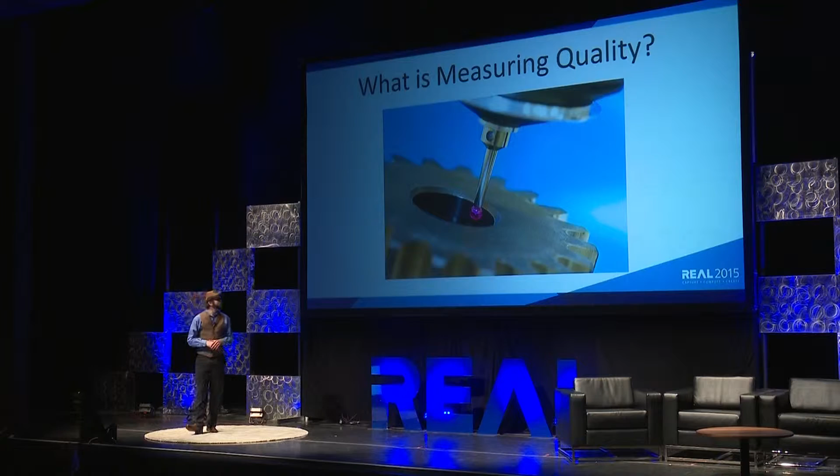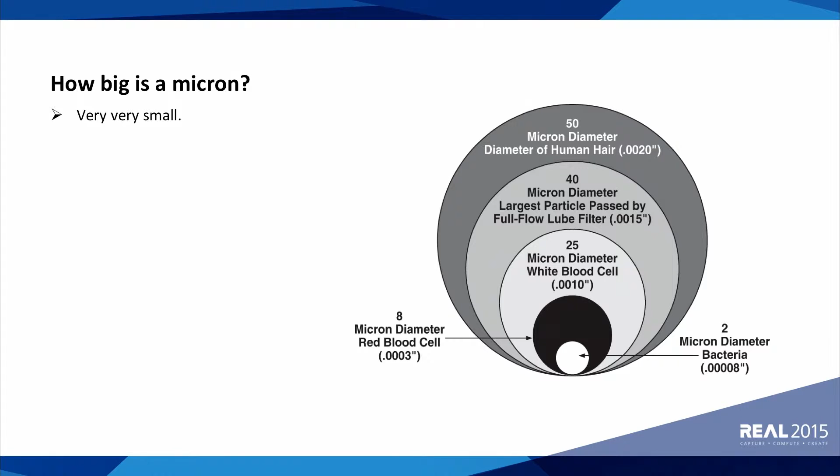So we've had a lot of talk about 2 millimeters, 1 millimeter. These are some of the tolerances I like to work in. 8 microns is the size of a red blood cell. You have 2 microns, which is a bacteria. The smallest I've ever had to measure was 258 angstroms. Now, an angstrom is the size of an atom. So we're talking extreme tolerances and trying to figure out solutions to be able to do this, because a lot of times there is no solution. You have to make it.

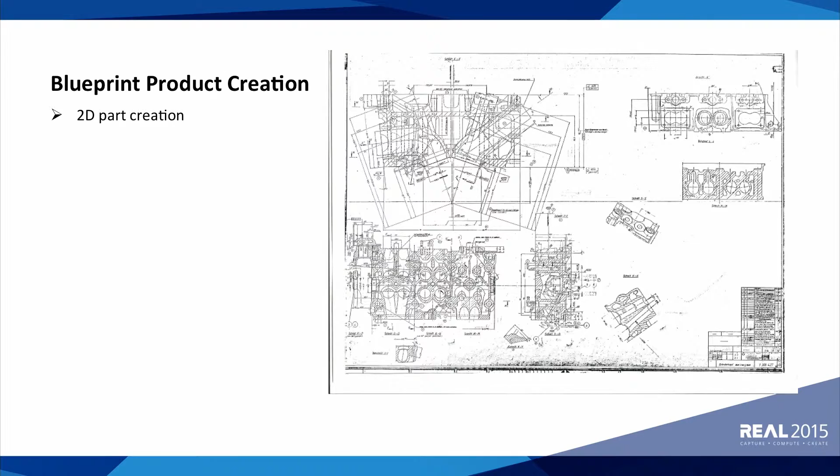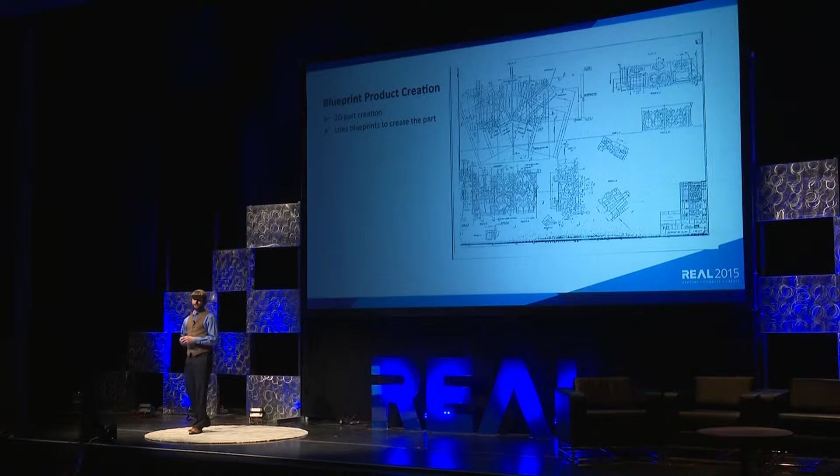So moving forward, first of all, we have blueprint product creation. That's our standard still today, actually. Models are coming, they're getting there, but over 60% of our customers and companies still all work off blueprints for measurement. And that is the standard today. Mainly because FAA dictates us holding information for 40 years. And so far, nothing we have can actually hold information for 40 years other than paper. So that's still the standard.

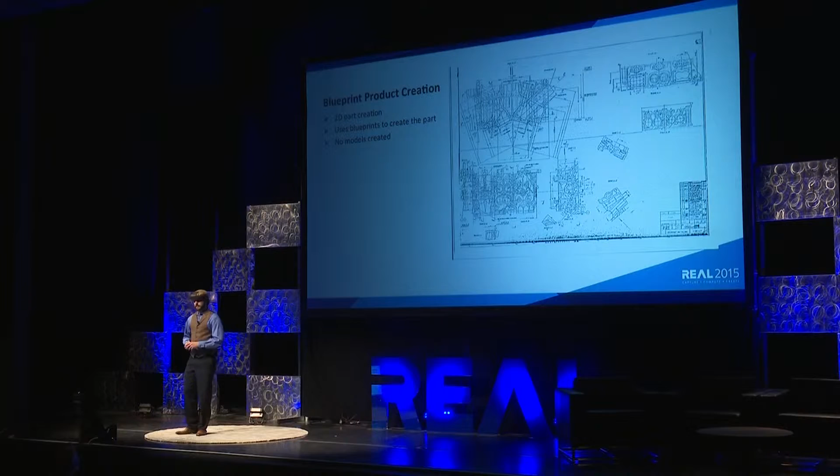Moving forward, we have model product creation. It's coming, it's going further, getting faster, and we can have teams in Asia, Europe, as well as the United States, all working on the same product together and actually create an airplane from it if we wanted to, all in real time. Using model-based definition, GD&T, it allows us and ensures us to be able to measure everything very accurately, along the lines of being able to take all the information and know we got it.

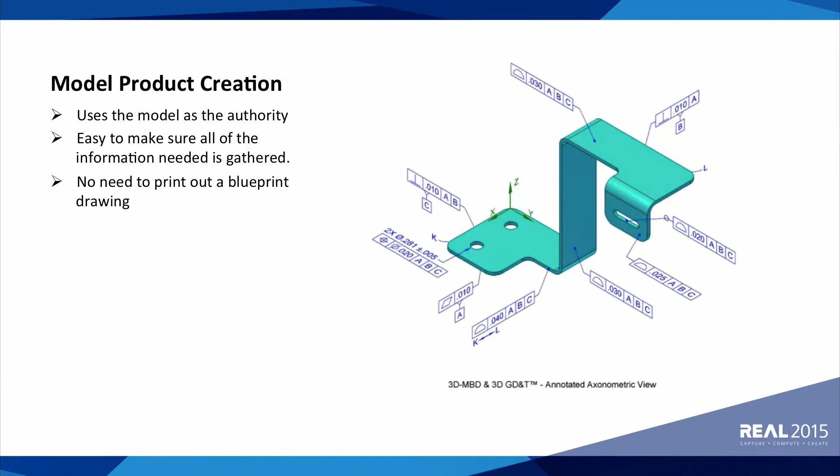If you noticed on the blueprint, it's pretty chaotic if you want all your information. So going through it, it's a tedious process. You have to measure everything very slowly and make sure you get it all. So easy to make sure, no need for blueprint at this point in time because, you know what, just measure to the model. You can align it. There's great software out there now. Align it, measure it, report it.

And there's a third, little less known, the reverse product creation. A lot of our products nowadays, like our helicopters, our planes, the A380 and the 787 are the first two aircraft for jumbo jets to ever be fully modeled. Most of our aircraft still are blueprints. I like to tell a story about how I reverse engineered the 747-4, and when I went to lock into the golden points, I needed some of the blueprints, and golden points are what aligns us to an aircraft. They pulled out a dusty old box with a lock on it for me. Broke it out, we put out all these blueprints, and unfortunately a golden point had changed, and an engineer redlined it, put his name, as well as his phone number, and unfortunately the guy had been dead for 20 years. So models and blueprints, they're not going away, but we can reverse engineer things and create something like this.

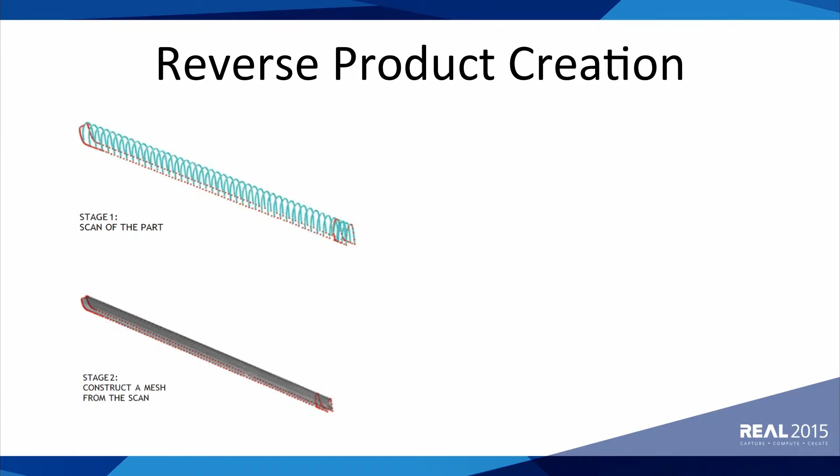Stage 1 of the reverse engineering process, measuring. Either station lines, waterline, or full coverage. Doesn't matter, whatever gets you the best accuracy that you're looking for. Second stage is creating either a quadratic or polygonized mesh. Third stage is creating the CAD from that. And then the fourth stage, the little known fact, is actually making sure what you create is correct. That's probably the most important stage because every CAD software has a little bit different algorithms. One of the big problems we have in the industry is that reason. When we create CAD, throw it into another CAD software, we get something else.

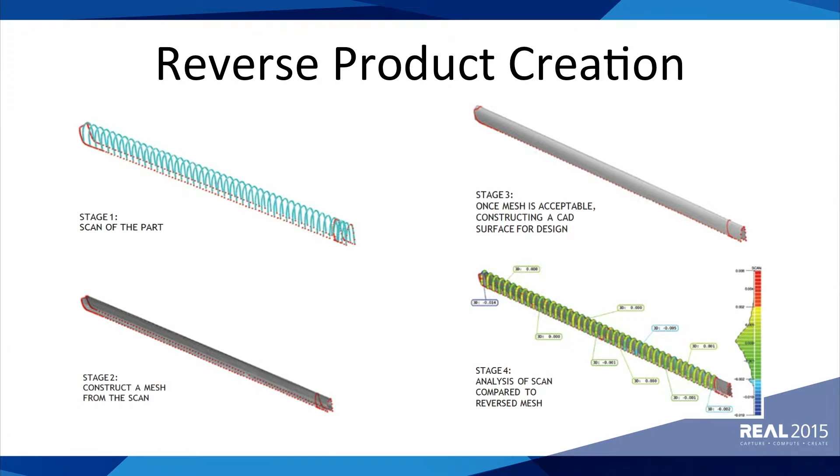But this is actually an Apache rotor blade. Pilots went out, tested multiple helicopters, found the helicopter they liked the best, along the lines of jitter and shaking, and then created a new blade from that for these helicopters since they were all done on old molds. So we created a brand new mold from that, created brand new rotor blades, and went forward.

So this is another one. A lot of things are moving towards composites. Composites are becoming our standard for aircraft now, especially military as well as commercial, getting more and more common. As you can see, this is an inlet duct. It's a carbon inlet duct. Currently, we're at 100% repair on all of them.

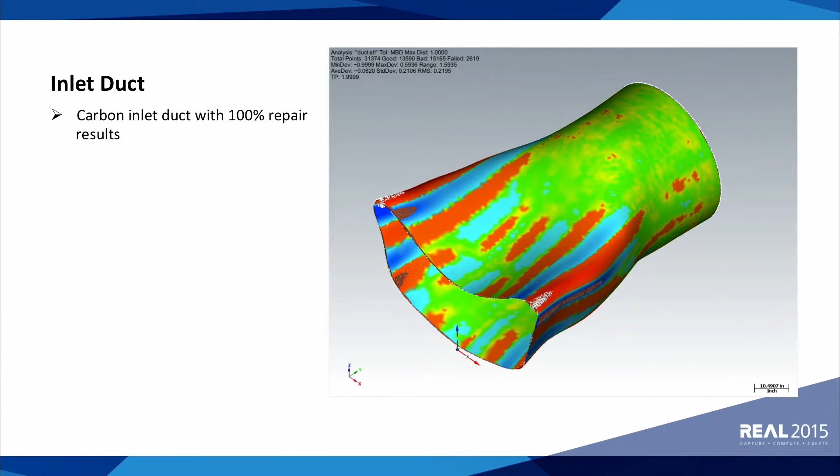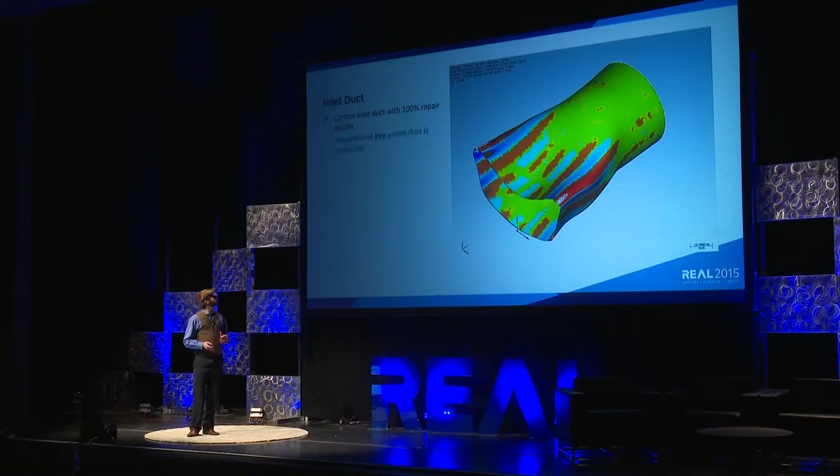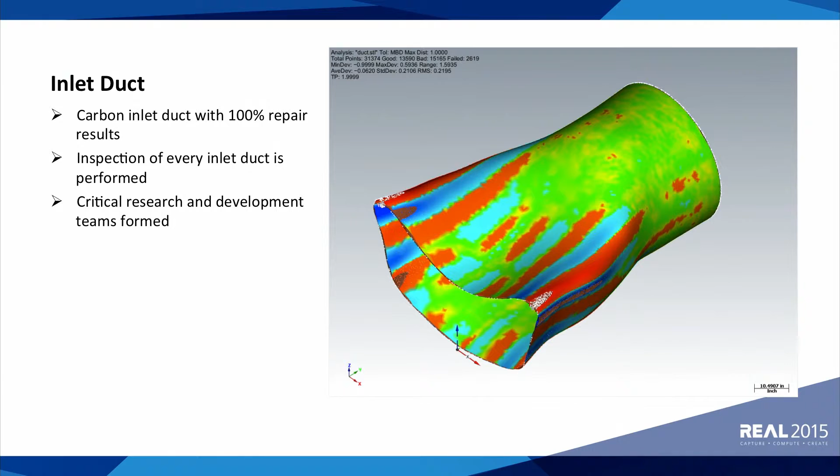Reason being is we have sacrificial plies we build into them to be able to get the geometry right, as fuel lines have to be at a certain distance from those inlet ducts because of hot air going through. But we can learn so much more from actually capturing all this data. We try to shorten the time span, but we only do 1 out of every 10 measurements on each inlet duct, or 1 out of every 50. It's about getting it to every single one we want. So we do critical research and development programs on situations like this to better understand what we're seeing, to be able to change it inside the process.

This is a wind blade. A lot of the wind blade manufacturers today are at 1 blade a day manufacturing. That's quite something when you imagine that blade there is 40 meters. So creating a blade a day, and they go up to 65 meters, even bigger than that. 1 blade a day is quite something to be able to control your process, because you're heating these blades up, they're all composite. You're heating the molds, and when you heat composites, they change. You have no choice in that matter. When they cool, they don't cool in the same position that they were at.

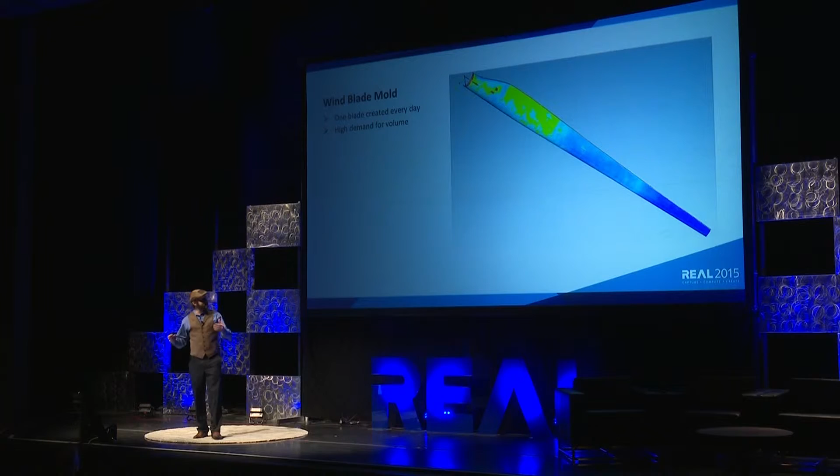So instead of measuring the molds, you measure every single part. And then you can start predicting what's happening to your mold at that point in time. So it's about getting more measurements, faster and better. And with blades, there's an airfoil analysis. It's still technically a wing for an aircraft. It's the same type of process.

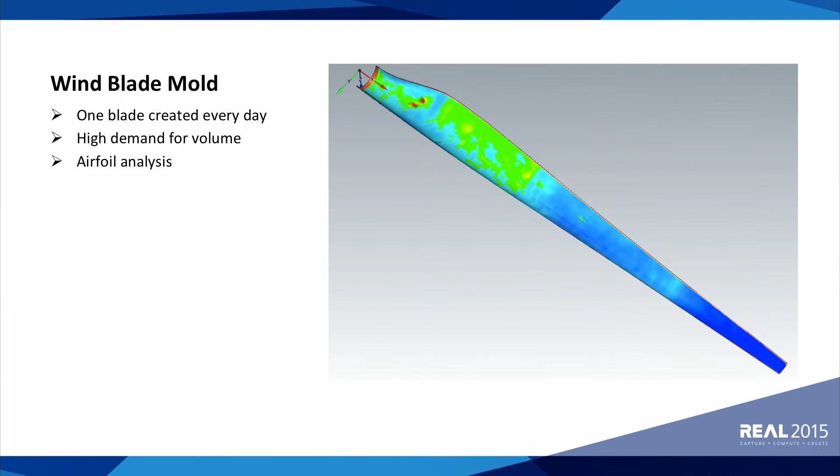That's a problem. So we actually used the laser radar system in the high bay. You have to shut down all the ventilation systems so it doesn't move. They're looking for how it's splayed out. When it's going up into space, it's going to unfold and unfurl, and it has to unfurl in a certain direction. So it's advanced technologies like this that we have to find solutions for, and going forward we need to capture all the data. These things have been measured thousands of times, and all of it's aggregated into a custom system at this point. What we need to do going forward is have more things like this.

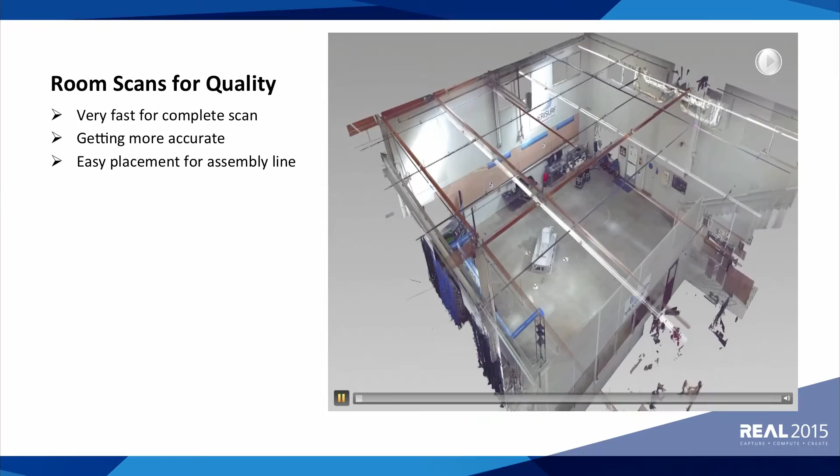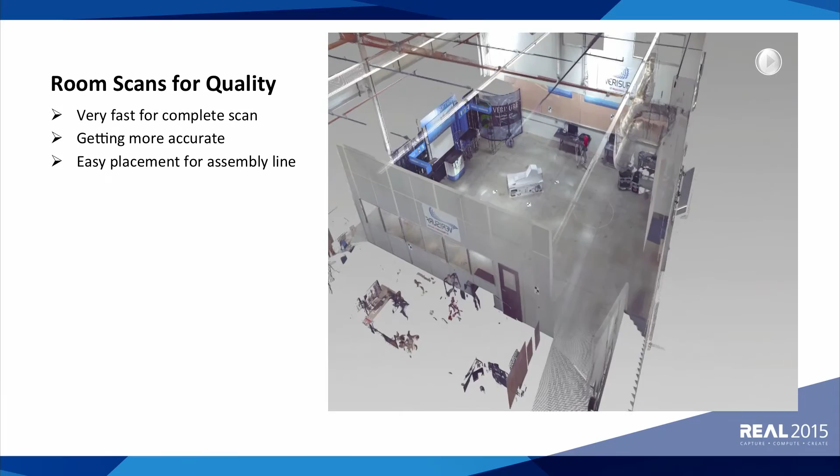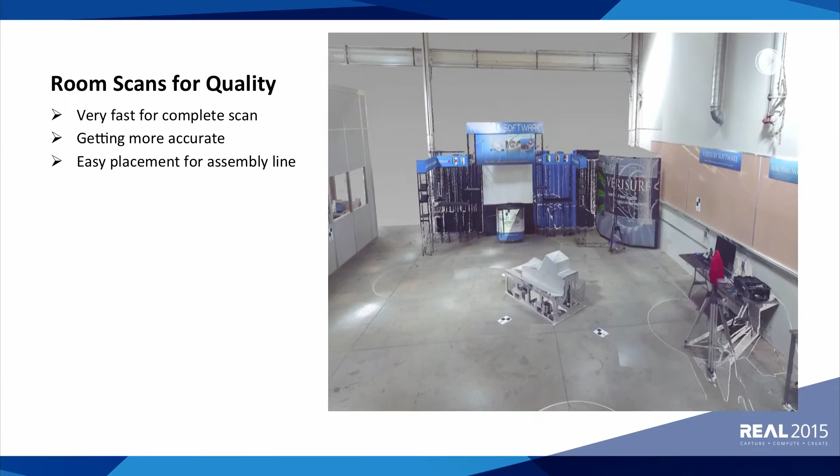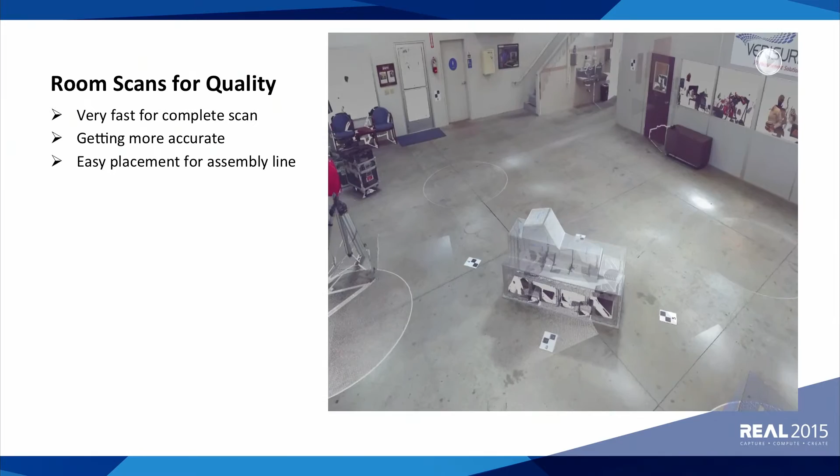This is a room scanner, we've seen them all week. But the big thing for me is the ability to get these actually more accurate. Faster data capture gives you more accuracy. The longer you take, you get thermal expansion, changes in the environment of the room — tons of things change with every second that you're measuring. So if you can set up, say, 5 of these systems measuring within 30 seconds of each other, each part you capture is a snapshot of what it was at that moment. That's actually a Boeing part for a landing gear.

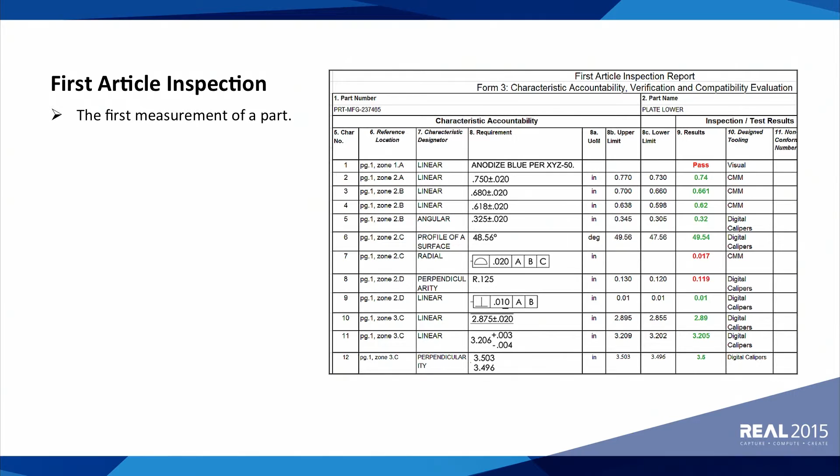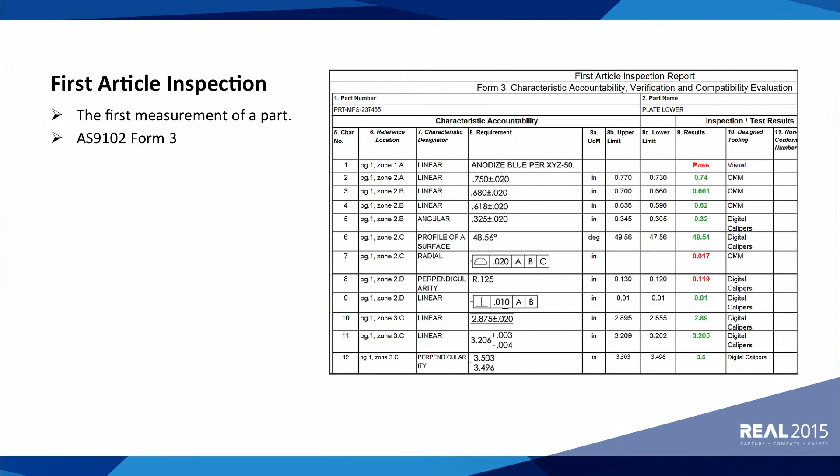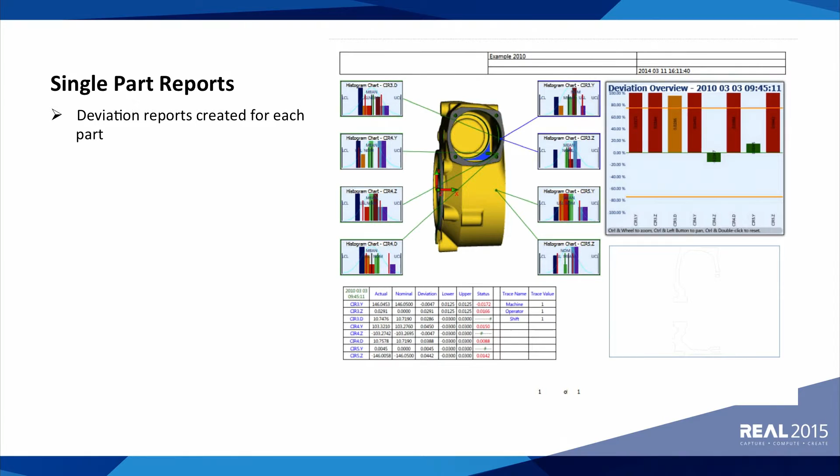So after all these measurements, what do we get? We get a first article inspection report, AS9102 if you're in aerospace, Form 3, or a PPAP report if you're in automotive. These reports are generally filled out by hand in an Excel document still, and after you're done with it, generally that's it. You also get a single part report. These are all great, I love them all, don't get me wrong, but they tell me one thing: that the part's either good or bad. So what do we do with this data? We sign it, we stamp it, and we put it into a big box generally right now. The part's good.

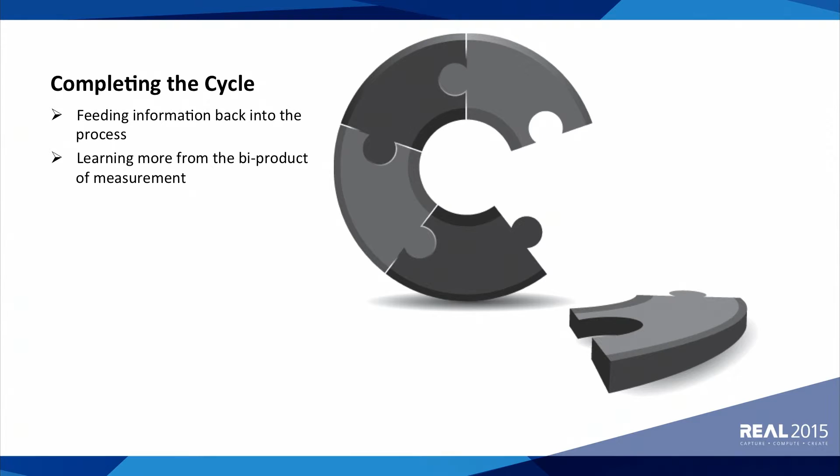That's good, but there's a lot more to it. What did we learn off that single part? What can be improved? There's a lot to it. So my call to action for a lot of people is feeding process information back in. You take every single part, learn from it, and go forward. So it's about learning from the byproduct of measurement — what did I learn from each and every part I ever measured going forward?

So there's human analytics to it: how was it machined, how was it measured, what was it measured with, what material was machined, and that type of thing. From this you get statistical information, and from that you get better business decisions. Reason being, if I know that this Haas machine over here machines within 0.005 of an inch each time on titanium, and I have another Haas machine that hits 0.015 of an inch every time for accuracy, why am I putting a 15 thou part on my 5 thou machine? I should always put it on my 15 thou machine. There are things like that we can learn from measurements if you're doing them constantly — predictive analysis, like I touched on with the GE blades. You're able to go back, understand, and actually predict when that mold's going to fail.

It takes a long time to build a mold, 5 to 6 months. So you're able to see when that mold is going to fail, get the process set up, and then move forward and have a mold in place by the time that mold fails.

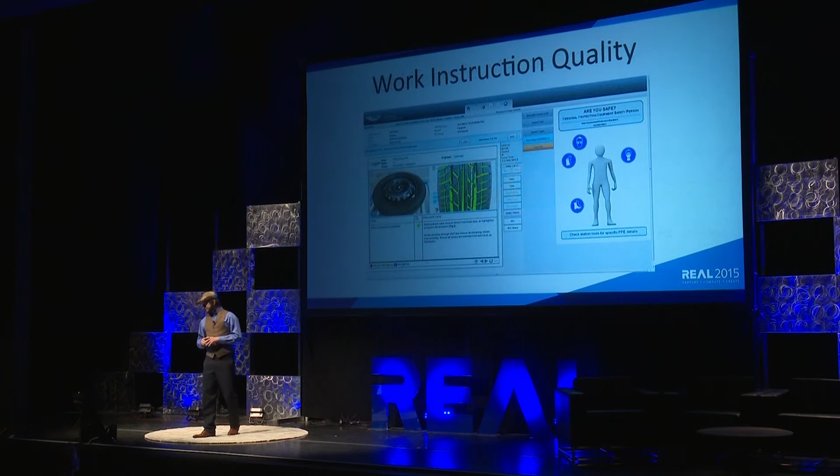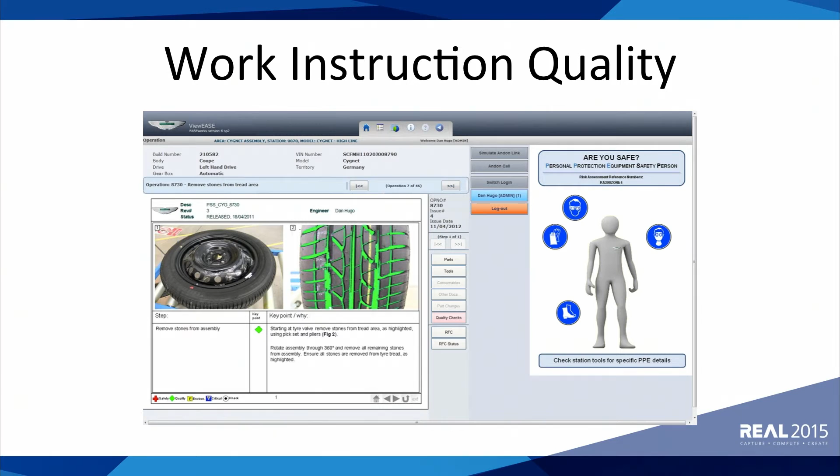So it would tie into work instruction quality. Being able to say, I know this guy takes a little bit longer, so let's go ahead and structure it so he knows the time frame, how long it should take, how to do his job, get it done quicker, faster, easier.

You can also tie it into metrology software, the actual measurement software. Have them tied up, throw it into the cloud like we like to do, and have every single piece of information you take go into the cloud for better understanding. If you have measurement plans for metrology software, basically it steps you through, you can say this hole has been within 2 microns for at least 100 parts. Let's take that down to measure that hole every 50 parts, because it's not moving.

You can also do it to machining software. I've been around it for a long time actually, my uncle's company builds custom robotic machines. Everybody I've ever met that builds robotic machines has always told me ours hits this tolerance every single time. Well, that's not true, because whoever's doing the machining is picking the paths, the parts, and everything else. So you can actually tell if this guy machines a part differently from this guy after you measure it, because if they're not doing exactly the same every single time, there will be a difference.

So if you're using a 3 flute versus a 2 flute, you can actually see that in the measurements, especially when you're doing tight measurements, because there'll be a little swarf or chip or chatter going into the actual part itself. It's just looping the information back into the process to make everything work easier and faster, and a better understanding for everything.